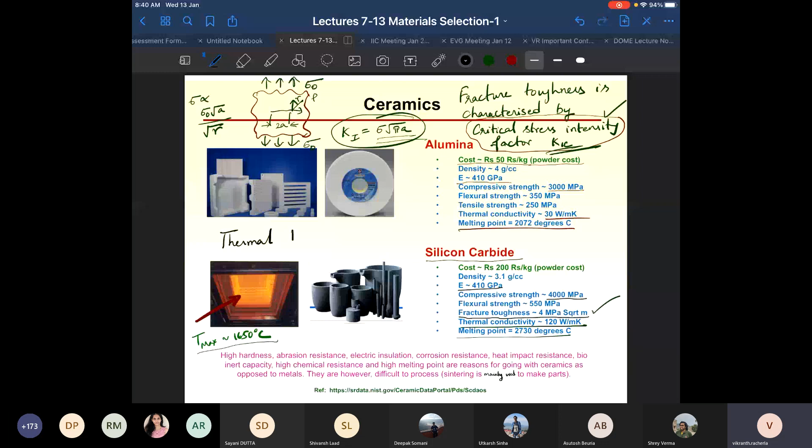What actually matters is not thermal conductivity. So for diffusion of heat, what is the parameter of relevance? Is it really thermal conductivity? No sir, that alpha term is important. So what matters for conduction of heat is thermal diffusivity. What is thermal diffusivity? It's basically equal to K divided by rho C.

Okay, this is thermal diffusivity. Now in this particular case, K is high, rho is low. C, specific heat, is comparable to other materials, so automatically this leads to high thermal diffusivity.

So have you heard about something called diffusion time? Have you heard about this? Yes sir. What is it? Sir, so it is that time that heat takes to propagate, something like that is transient heat transfer.

So diffusion length is square root of 4 alpha t, not diffusion time. Diffusion length L is equal to square root of 4 alpha t. So it tells you how quickly heat is diffusing within the material. It depends on diffusivity and time.

Anyhow, so this is about silicon carbide. Now there is one application where this very high compressive strength and good fracture toughness really matters. It really comes in handy for cutting tools, grinding grit, and one application you may not think much about is for making armor plates.

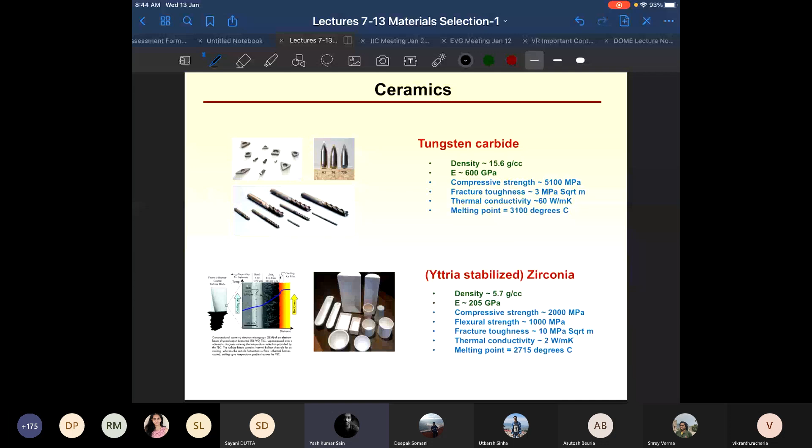Sir, which one will be a better choice for armor, like polycarbonate or these ceramics?

Ceramic, of course, is a much better choice for bulletproofing applications. But two things - where is polycarbonate used? Polycarbonate is used wherever you need the transparency property. So like prime minister, chief minister, when they are giving speeches, they want some level of protection from bullets, so they put these polycarbonate panels in front of them.

But they will not really be effective for protecting against, even amongst guns, depending upon the caliber of the bullet, the mass of the bullet, the velocity with which it is coming, you need an armor accordingly. So if you are getting protection from a small pistol, a polycarbonate based armor may be sufficient. But if you are going to need protection from assault rifles or armor piercing bullets, then polycarbonate will not work.

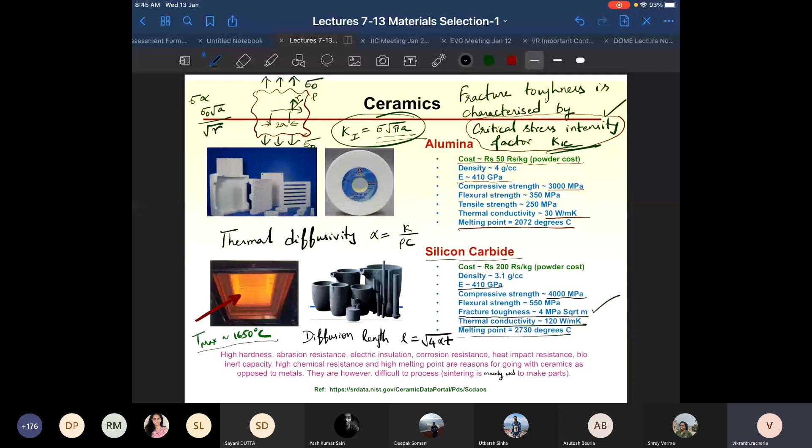So over there you will need much better armor, like for example ceramic tiles which are made out of alumina or silicon carbide. So what you will use will depend on what you are trying to protect yourself from.

All right, next let us look at tungsten carbide. There are not that many ceramics, so don't worry, we are only going to talk about 4-5 ceramics. So next is tungsten carbide.

So what are some of the properties which stand out for tungsten carbide? One of the things is it is dense. It is very dense. Tungsten is a dense metal, and tungsten carbide is also dense.

What is the density of steel? It is around 8 grams per cc. Steel is 7.8 grams per cubic centimeter. Tungsten carbide is 15.6 grams per cubic centimeter, so it is nearly exactly twice as dense as steel.

So it feels quite heavy when you hold it. It is very stiff, so its shape doesn't really change upon application of a force. It has very high compressive strength, even higher than that of silicon carbide. Fracture toughness is decent, thermal conductivity is decent, similar to that of steel, and melting point is quite high.

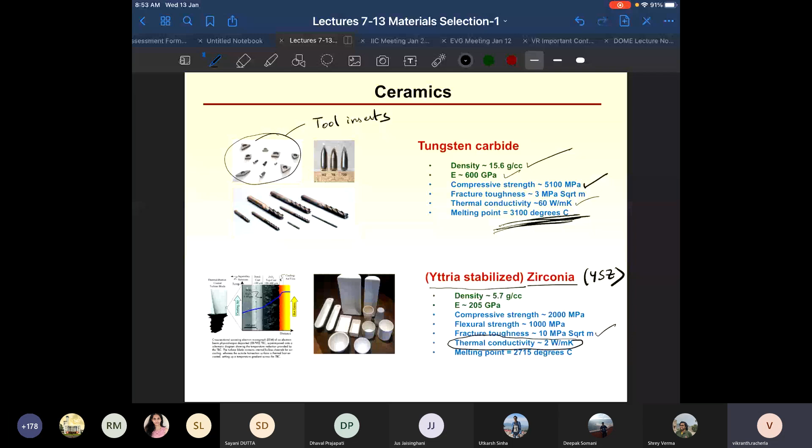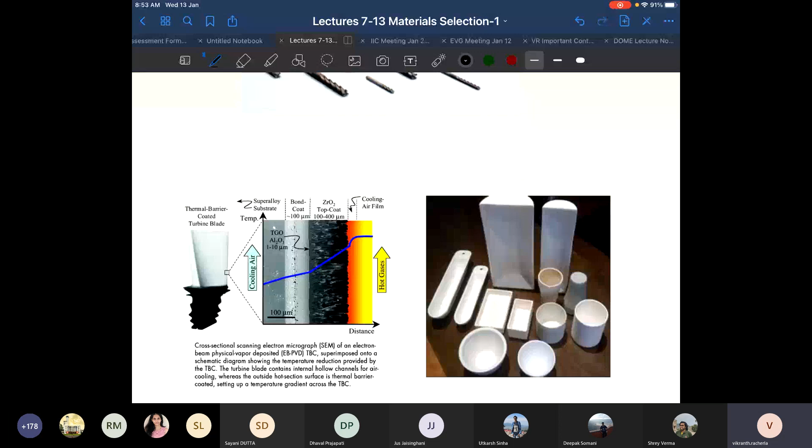So if you take a look at this turbine blade, this white colored coating that you see is basically the thermal barrier coating. Look at the temperature profile over here. This is the basic turbine blade material, the super alloy, as written on top, and then this over here is the coating. This is called the bond coat.

Anybody, what is a bond coating? Any idea? Ceramic doesn't really stick to metals. There is not much chemical adhesion between ceramic and metal. So if you deposit the ceramic coating directly on metal, it's not going to bond. So you deposit an intermediary coating called bond coating. It's like if you want to stick a poster on the wall - you first put some glue, and then stick your poster on the glue. So it is a bonding agent, just like glue is a bonding agent. In the same manner, you put something called a bond coat. The bond coating material is such that it will bond well with the substrate, and it will also bond well with the ceramic coating. So you put the bond coat on this, and then finally you put your ceramic coating.

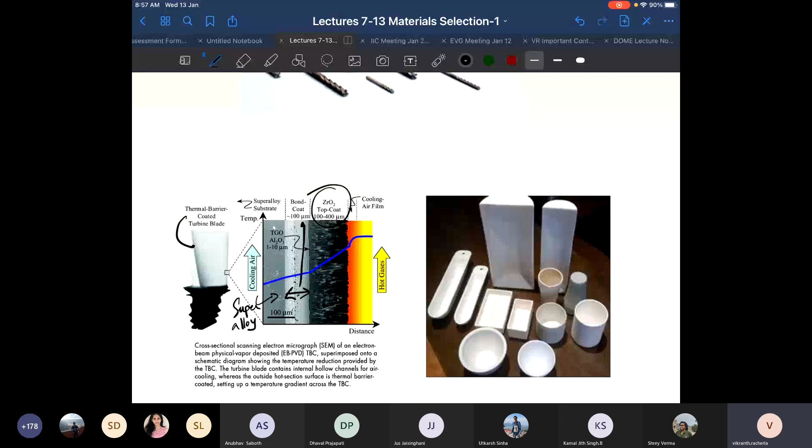If you want the turbine to move fast, then probably the air will get heated with friction. The higher the operating temperature, the higher the efficiency of the system. You're trying to get more power out of the engine, and for that the operating temperatures need to be higher. But at such high operating temperatures, the metal cannot really retain its shape effectively, so it undergoes a good amount of creep - so you provide these protective coatings.

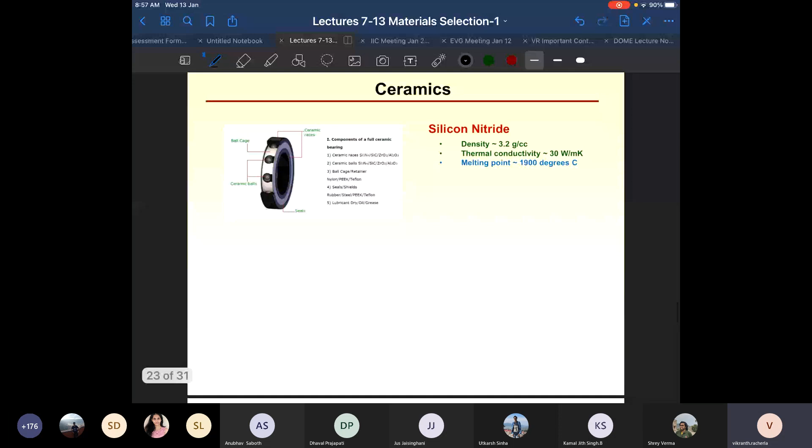Moving on to the last ceramic we'll look at: silicon nitride. It has a relatively lower sintering temperature, which makes processing easier compared to other ceramics. It also has a relatively lower density.

At 3.2 grams per cc, very close to that of silicon carbide. One application where silicon nitride is used is in making bearings, specifically ceramic balls and ceramic raceways.

What do you think would be the advantage of using a ceramic bearing over a steel bearing? The bearings we normally use are made of steel, and I've even given you the grade of steel used. So what might be the advantage of using ceramic balls and raceways over steel?

Sir, brittleness. Why would that be an advantage? Sir, low density. So, weight - it will make the bearing lighter.

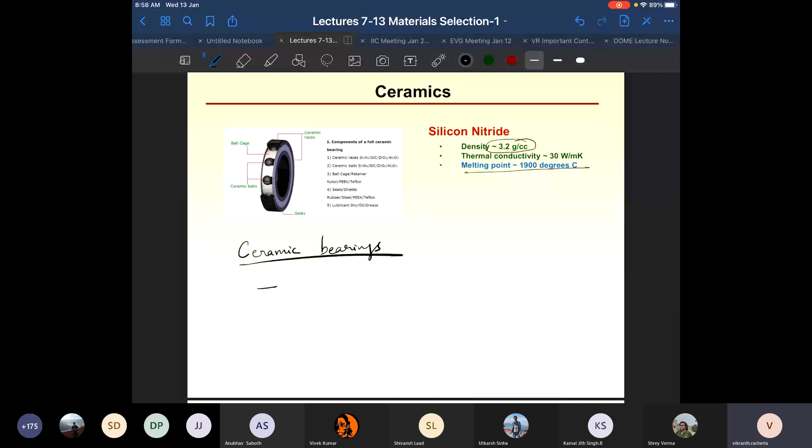If you look at the advantages: first is low friction, so frictional losses are lower. What this allows you to do is operate at high RPMs.

What is the typical rotational speed for most motors and engines? What is the common operating RPM? If you take induction motors, most motors around you are induction motors, so what would be their RPM?

For a 4-pole induction motor, all of you have taken an electrical engineering course - what is the RPM at which induction motors spin? They spin at about 1400 RPM, 1440 to be precise. Let's say 1400.

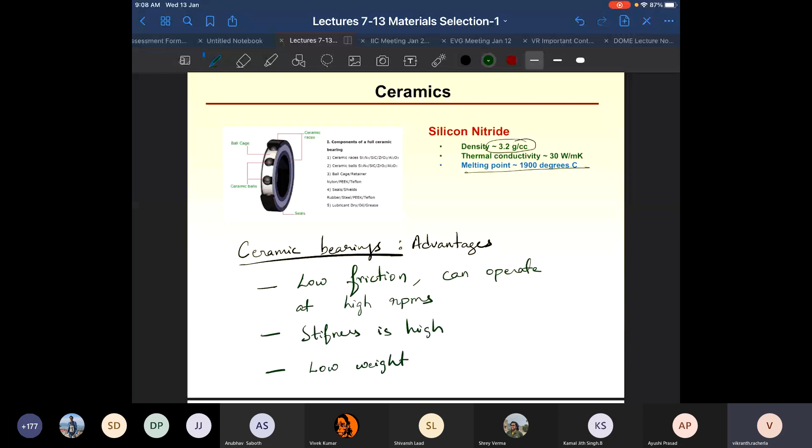All right, next let us go to some math associated with material selection. Now one of the things we do for quite a few applications is try to reduce the weight of the system. Now weight reduction is important for several reasons. So what do you think is the advantage of reducing the weight?

Let us start with some static structures. Let's say you're building a bridge, for example. Now what is the point in trying to reduce the weight of the bridge? You are anyhow not going to bear that weight - it will finally go to the ground. So why do you care about reducing the weight?

To put less stress on the beams of the bridges. Self weight is only a part of the stress within the structure - normally that is the smaller part.

To some extent your answer is correct, but it's easier to construct or assemble, and we should use as less material as possible so that cost is also low.

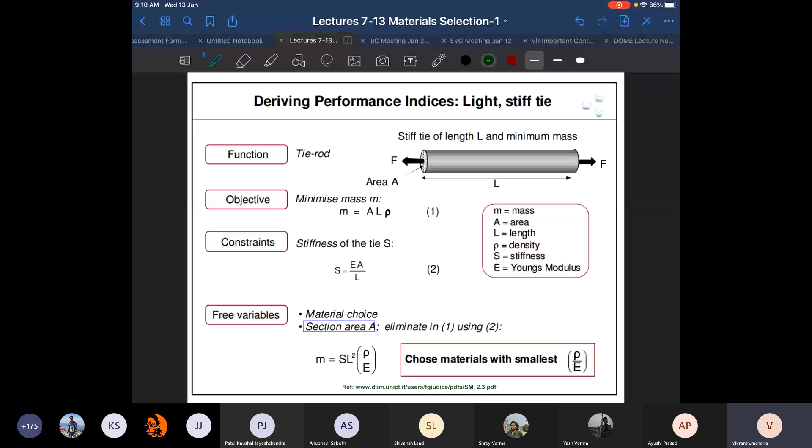In business, the bottom line is all that matters for the top management. So for the business to sustain, the cost of production must be low, and you need to get as much price for your product as possible. Now to lower the cost of production, reducing the weight of the system is a very good strategy because it helps you lower the material cost, it helps you lower the handling costs, because the heavier the things, the more difficult it is to handle them. So weight affects a lot of things, and by lowering the weight of a structure, you can basically lower the cost of your entire system.

Now there are two things that you initially start with to figure out what material would be a good choice if you want to reduce the weight of your members. One is from stiffness perspective, and second is from strength perspective. So for example, let's say you're making a steel bridge - can you give me some examples of where you see steel bridges?

Where do you see steel bridges? Road crossing, railway crossing. Railway crossing, not road crossing really, pedestrians. So railways make extensive use of these bridges, which are made out of steel structures.

So let us say there is a steel bridge, and a train is passing over it. Would it be acceptable for the steel bridge to deform or deflect in any big way when the train is passing? No, sir, it would not be acceptable. In any structural application, you want a certain stiffness from your structure.

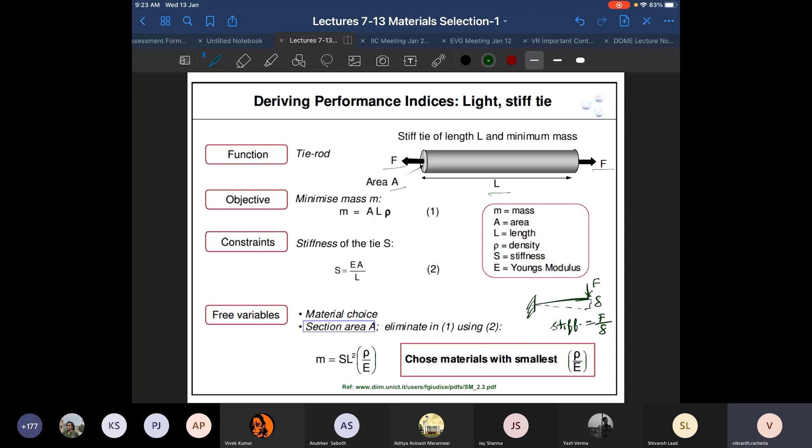Or you can look at materials with highest value of E divided by rho. So it is not simply the elastic modulus that you look at, but you look at elastic modulus divided by the density of the material if you want to reduce the weight.

Now, in the same fashion, let us say there is a beam, and for analysis purposes, a square sectioned beam is being considered. So height of the beam is B and width is also equal to B. And over here, it is being subjected to a load in the center. What do we call this kind of a loading?

Flexural load, bending load. What do we call a beam which is being loaded in the center, free to rotate at the ends? It is a simply supported beam. So at the ends it is free to rotate and you're applying a center load.

Now for this particular beam, we would like to minimize the mass. Where will the deflection be highest? At the center. Now what is the mass? Mass is again cross sectional area into length into density.

Cross sectional area in this case is B square. So B square into length into density. Now what is the stiffness? Stiffness is once again, for a beam, stiffness is F divided by delta.

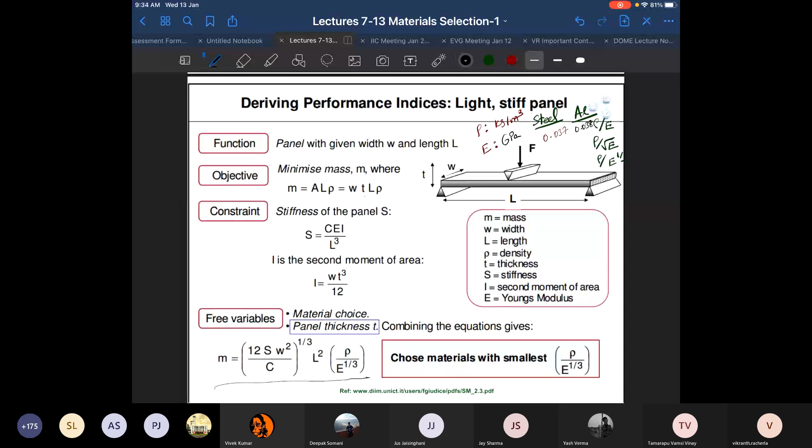What will happen for a beam? What is density divided by square root of E for steel? So 0.538 for steel. Okay. And what is it for aluminium? 0.3227. Fine. Okay. And then for a panel, what will it be?

What is it for steel? 1.312. Okay. Aluminium? One second. Aluminum is 0.66. Okay, so what do you see now?

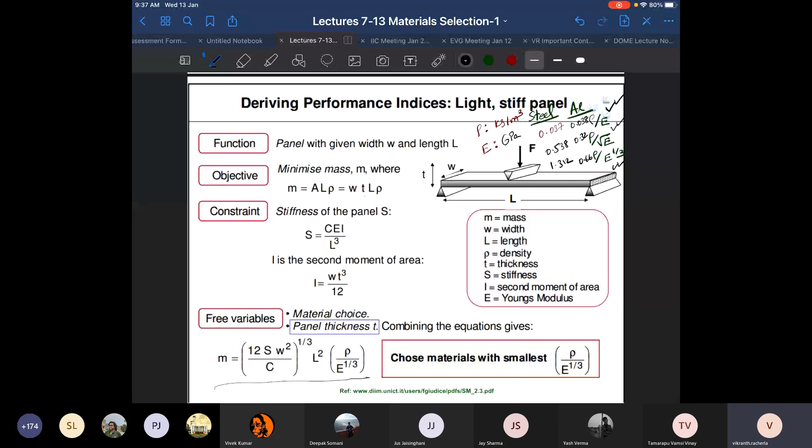If you are subjecting it to tension or compression, you should be looking to minimize rho divided by square root of E when you are subjecting a beam to bending loads, and you should be looking to minimize rho divided by cube root of E if you have a panel which is being subjected to bending. Now, stiffness is one of the things you are concerned about, and you can look to minimize the weight keeping stiffness at a certain desired level.

The next thing is strength based design. In strength based design, what is imposed is the constraint that the maximum stress in the material should not exceed the yield strength of the material. So once again, let's take a beam. It is being subjected to tensile loading. The mass of the beam is cross sectional area into length into density.

And what is the constraint equation now? The constraint equation is F divided by A equals sigma y, meaning F divided by A must be less than sigma y. In the limiting case, it will be equal to sigma y. So what is A now? A equals F divided by sigma y.

Now, if you plug that in, then the expression for mass will be F into L into rho divided by sigma y. Now, in the expression for mass, what is given in an application, and what will depend on the choice of the material?

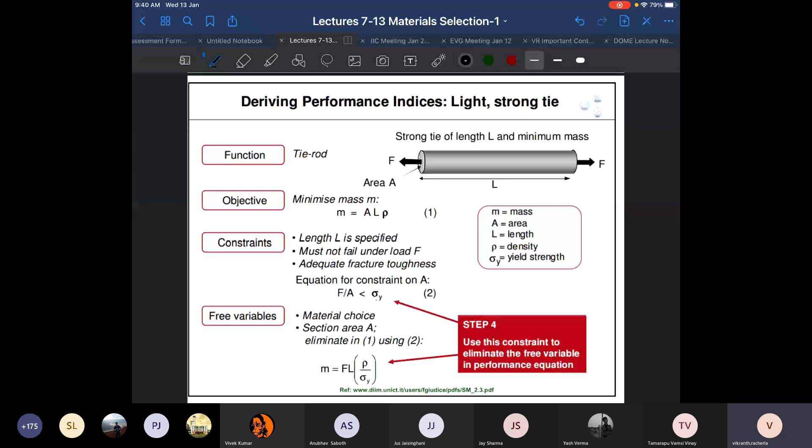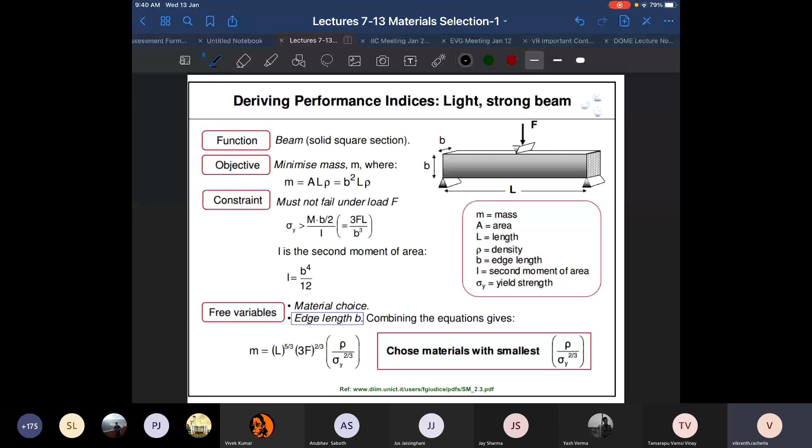Now let's take a beam. In a beam, once again the maximum stress would be equal to sigma y. What is the stress in a beam? How do you get the maximum stress?

When a beam is subjected to bending, what is the expression for bending stress? It is M y by I. So what is the expression for the maximum bending stress? Sigma max will be M into y max divided by I.

So M equals to F into L by 2, y max will be equal to b by 2, and I is anyhow b to the power of 4 divided by 12. So from this expression, we can write b in terms of sigma y, and finally we can write M as equal to something in terms of L and F into rho divided by sigma y to the power 2 by 3.

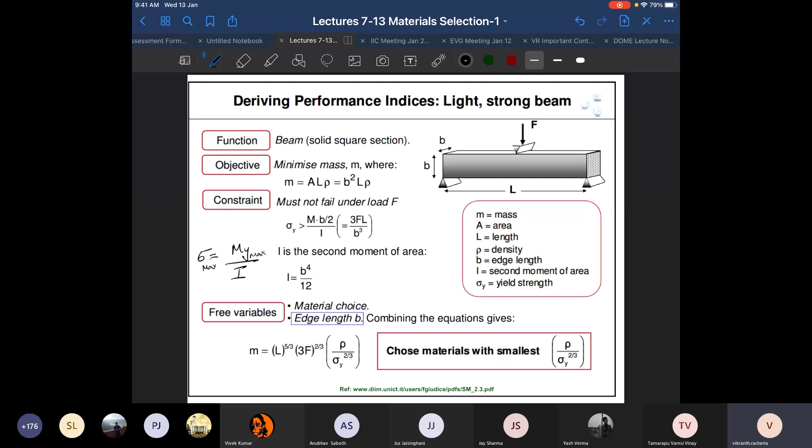So we have to pick material with the smallest value of rho divided by sigma y to the power 2 by 3 in order to reduce the weight as per strength.

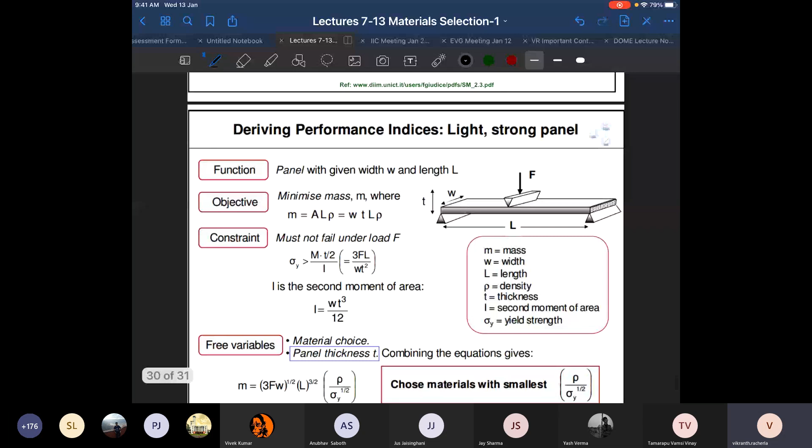And for a panel, we can go through the same exercise, and you can show that you have to minimize rho divided by sigma y to the power half in order to minimize the mass. So this is the summary slide.